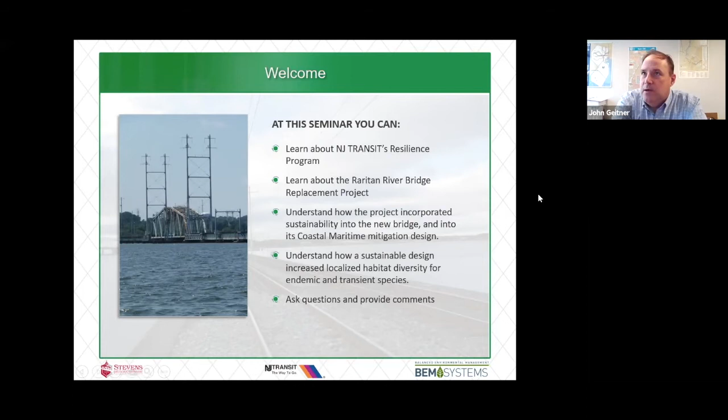A couple things about the resilience program. New Jersey Transit was the beneficiary back in 2014 of some resilience grants. These were federal grants designed to provide New Jersey Transit with funding after Superstorm Sandy. Sandy struck in 2012, and here it is 2021. So you may wonder, why has it taken so long? Why does it take so long to spend money and to build and do things? Well, there's a lot of answers to that, and I think we'll probably go through some of that as we discuss the Raritan River Draw project.

But first and foremost, there are 5 or 6 projects that fit under our resiliency suite, one of which is the reconstruction of the bridge we're about to speak about. The particular bridge I want to spend some time on, that Harold will talk about in terms of coastal resiliency, is what we call the Raritan River Draw, D-R-A-W, draw.

The bridge has an interesting history. The original bridge was built in the late 1800s and served the area until the early 1900s. It was rebuilt around that time to its current configuration. And here in 2021, we're actually endeavoring to rebuild it again. The bridge did suffer some damage during Superstorm Sandy. The damage was repaired, but the bridge structure itself was definitely in need of upgrading and updating.

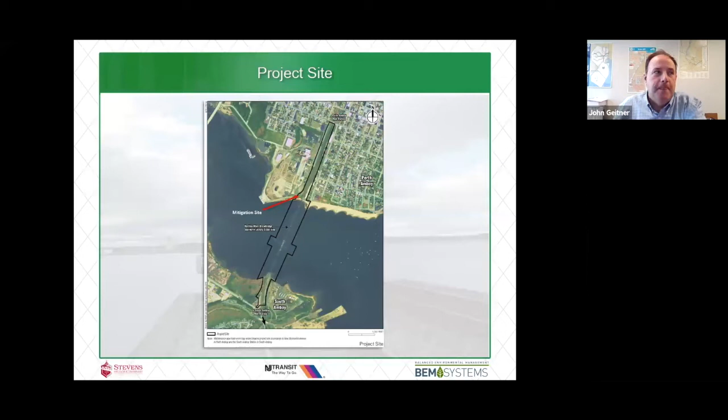Harold, next slide. So what is the bridge's purpose? On screen you can see a picture of the existing bridge. It's a low span bridge. You'll notice the bridge has poles associated with it. Those poles support a catenary structure, so the bridge supports an electrified rail operation. Catenary are the wires strung above railroad tracks that form the basis of electrical traction for locomotives that can take advantage of that traction. So New Jersey Transit does have electrified rail service in the area.

The bridge is a critical link between North and Central New Jersey and is part of our North Jersey Coast Line. It was built in the middle to late 1800s, originally by the New York and Long Branch Railroad, and we follow basically the same alignment. The bridge carries not only New Jersey Transit, but of interesting note to the project, it also carries some freight traffic in what they call the Conrail Shared Assets territory. So it forms an important link for both freight and commuter traffic across the Raritan River.

During Superstorm Sandy in 2012, the bridge did receive some damage. The damage was repaired, but as I mentioned earlier, there were damages to the structure that really needed to be addressed in a significant way by a full bridge replacement. New Jersey Transit submitted the project to the Federal Transit Administration, the FTA, which is our grant administrator, and it won a resiliency grant for replacement. It's a significant high dollar value project, about $650 million to replace the bridge.

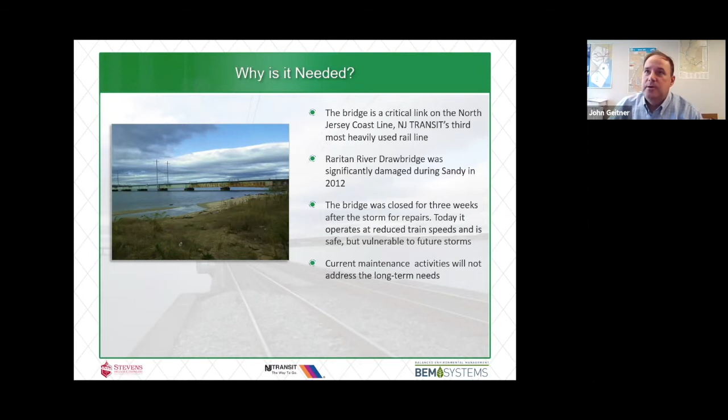We do currently maintain the bridge. It's actually a relatively expensive bridge to maintain. It's a relatively long bridge. And those maintenance activities, unfortunately, are not going to address the long-term needs to strengthen the bridge itself. That'll only be met by the replacement of the bridge. Harold, next slide, please.

So when we take a look at a project, we need to state a purpose and need. So obviously the replacement of the Raritan River Bridge is to bring about a more resilient structure that services the needs of transportation in this part of New Jersey, both public transportation and, of course, private freight transportation. We want to make sure that the new bridge design will make it more resistant to storm events and to ocean surges associated with storm events.

We want to make sure that we raise the tracks and some of the electrical and mechanical systems on the bridge to a better design flood elevation to make sure that it's less vulnerable to wind and wave action. We want to make sure that any components that we install can better withstand saltwater, ocean surge. Again, anything to do with water.

Keep in mind, I had mentioned that the bridge was, in fact, able to service electric traction. So a good component of the bridge is some of the components that feed that electrical traction system. So the goal here was to make sure that that system would not be vulnerable to additional wind and wave action. We wanted to make sure that its structural capacity is able to comply with current codes, and I'll speak more about that later.

But as you might imagine, bridges that were built 100 years ago, they're not as adequate as they could be for increasing size and load. And that's especially true on the freight side. In fact, on the freight railroading side, we've seen a significant increase in car capacity in terms of weight. So that seems to keep on going up.

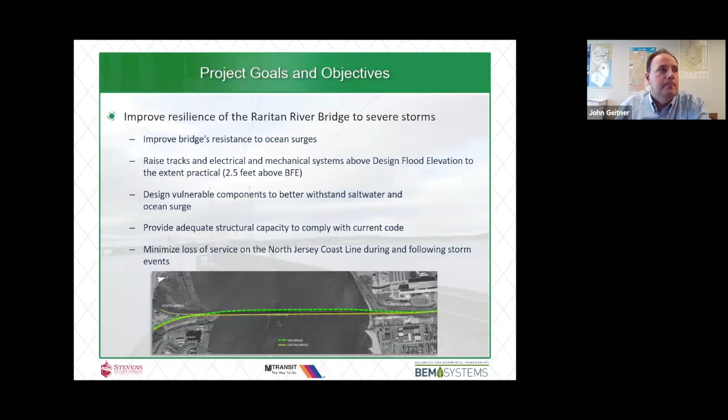So more specifically, some of the improvements that will be made as we replace the bridge, and we'll go over what kind of bridge we're going to replace in a second. But it needs to be designed to meet our design flood criteria. And I mentioned that was basically 2.5 feet above base flood elevation. And Harold will talk a little more about that later on, most likely. But New Jersey Transit does have design criteria. Right now, our criteria is 2.5 feet above what we call base flood elevation.

As we look at things like sea level rise or the increasing frequency or intensity of storms, we're going to need to revisit that number. In fact, right now, the New Jersey DEP and the governor's office are really developing a pretty sound resiliency plan, and thereafter regulations to support it that will take a careful look at flood elevation in light of threats such as sea level rise and, of course, the frequency and intensity of storms.

I mentioned earlier that we want to be able to accommodate heavier freight trains, right? So the current heavy standard now for freight cars is 286,000 pounds per car. So that's a significant weight. Freight railroads are looking to petition the Federal Railroad Administration to raise that even higher, up to 315,000 pounds per rail car. So that's pretty significant.

So when you think about the weight of things, just so you have a way of referencing it, a typical New Jersey Transit multi-level coach weighs about 70 tons. So here you're talking about a freight car that weighs in excess of 150 tons, more than double that. So again, freight cars are heavy. As they trundle along, they create a lot of stresses on rail, track bed, track structure, and of course, especially bridge structures.

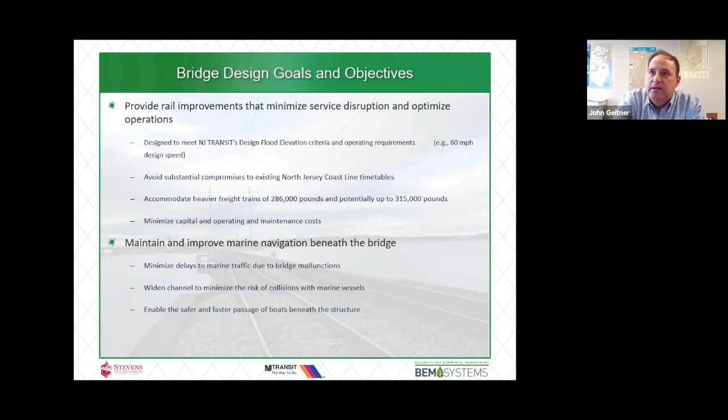We also took a look at, could we rehabilitate the existing structure? Would that make sense? Could we rehabilitate it to a point at which it would be able to support 315,000 pound freight cars and 60-mile-per-hour rail traffic? And when we took a look at that alternative, we understood that the amount of money it would take to rehab the existing structure was actually more than it now takes to replace the structure.

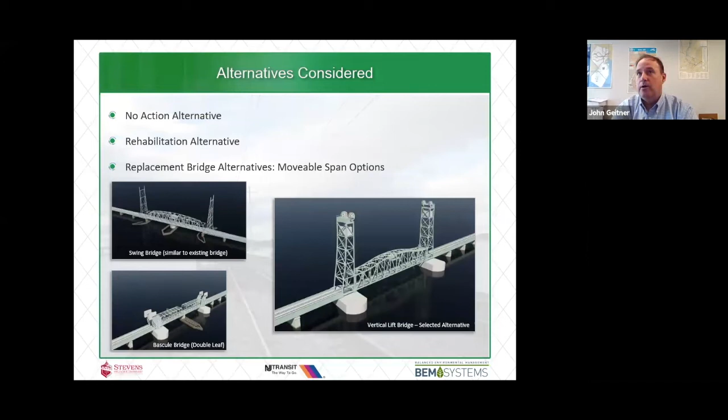So when we worked closely with the Coast Guard to permit this type of bridge, they were very interested in the height restriction because that does limit marine traffic. So we had to make sure that this bridge's height restriction was no less than other bridges upstream of this bridge. So that was an important consideration. So actually, when this bridge is built, it'll have two of the highest towers of any lift bridge in North America. So of note there.

Harold, next slide, please. So just a quick thing before I turn over to Harold. We talk here about the design flood elevation. I mentioned for New Jersey Transit, we had to work closely with our grant agency, FTA, to ensure that the design flood elevation that we chose to implement with the bridge was consistent with resiliency standards at the time.

So we relied on FEMA flood mapping. We took a look at the New Jersey Uniform Construction Code, which we're responsible to follow for structures that involve the public. We also took a look at the best available science data at the time. We looked at the 500-year floodplain elevation. We took a look at climate science and where things were going. And we came up with our design flood elevation based on those inputs.

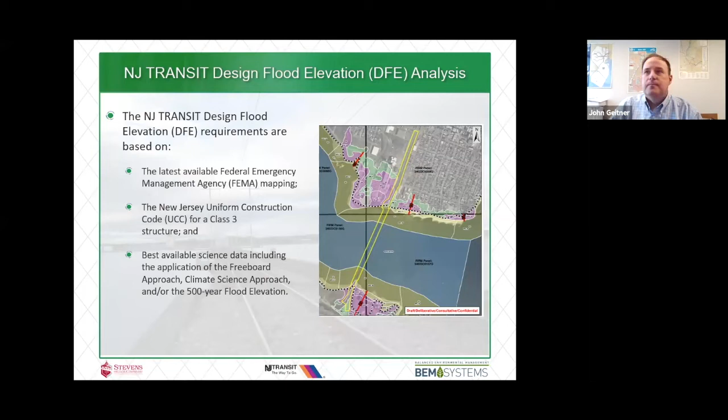So next slide, please. Kind of gives an idea, and again, Harold will take over past this slide, but for the most part, we chose a profile and an elevation that is consistent with our base flood elevation plus 2.5 feet for the design flood elevation. We wanted to make sure, and this was an important thing with this bridge, I mentioned it carries freight traffic. And if you can imagine, a freight train with several cars of 315,000 pounds, they don't climb hills too easily. So the approach to the bridge really needed to be carefully weighed out.

The approach to the bridge will be a little higher than the existing bridge, and that's consistent with our design flood elevation. It also helps us to keep critical components out of the water, but again, the design couldn't be too high.

Some people have asked, well, why not build a bridge that doesn't have a movable span? Why not build a bridge as high as a highway bridge? I think the obvious answer there is that the approaches for the bridge would have to be so far inland to avoid a grade that would otherwise make the bridge unusable for rail traffic. And to put the approaches that far inland would involve a great deal of property taking and whatnot. It would be a hugely expensive concept.

So this bridge is higher than the existing Raritan River Draw. It'll serve that purpose for resiliency. It'll meet our design flood elevation, but it'll still allow trains to maintain a 60-mile-an-hour passenger limit and allow freight trains to climb up and over and down the bridge safely.

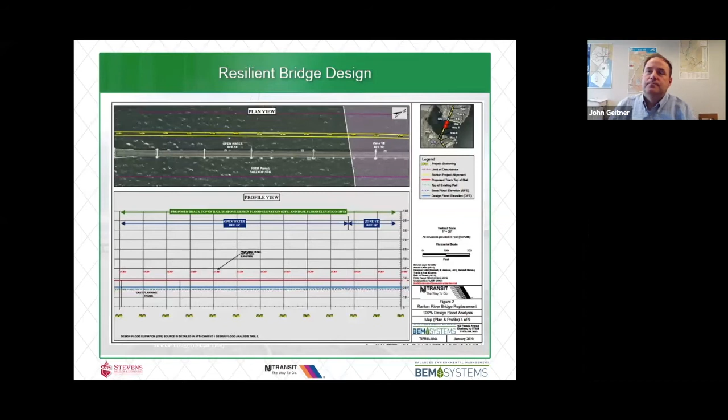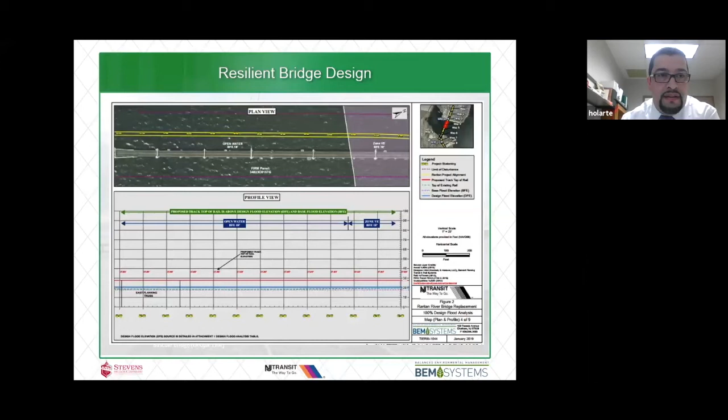Yeah, so just to add to this slide, John, I would just say to the group, basically there were specific segments of the alignment that could not be raised at the DFE. So those specific areas, their critical electrical components were raised or hardened specifically as needed. So we'll move on here.

All right, so you heard a little bit about the bridge improvements itself, and consistently with the improvements, there's obviously a permit effort to authorize that with DEP and the Corps. We went through that formal process. A component of that permitting effort was obviously to meet mitigation compliance for any impacts to coastal wetlands, subtidal, intertidal shallows. Overall, the impact for the project was about 0.384 acres.

We selected a site that John had shown initially in the overall aerial, which is literally on the northwest section of the project itself. This is the existing aerial of what that mitigation site looks like. Currently, there's areas that need some remediation. There's a lot of rubble and debris, which was kind of the historic old-fashioned way of hardening shorelines. Basically, whenever there were roadway improvements or construction debris, sometimes that was dropped and hardened along shorelines to really protect them from the dynamic impact of tidal waters.

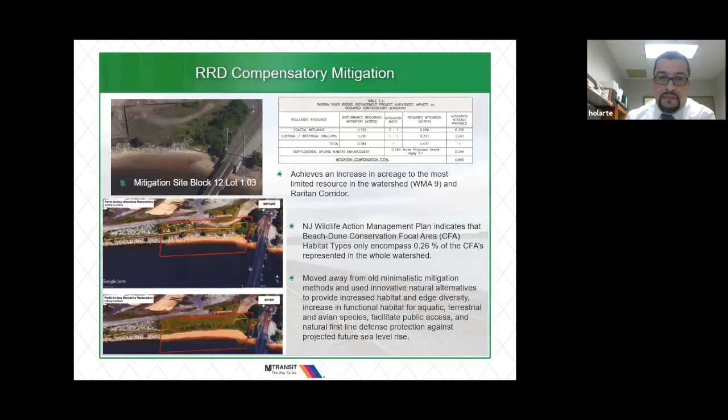We wanted to achieve restoring the lost historic wetland functions and values that were required from the proposed project, remediate the site, provide ecological functions, improve habitat for wildlife, prevent flood damage, and address sea level rise resilience for the project. So what does the mitigation provide in general? The way it was designed and reconsidered, it provides floodwater storage. It provides TSS removal, filtration from your landward side, and improves the quality of water being discharged onto your bay or tidal waters.

And it also provides filtration on the aquatic side itself with some of the measures we put in, specifically the oyster reefs or whelk reefs that are going to be implemented. A diversity of habitat that's going to support fish nursery and spawning functions, provide shelter, and baseline benthic resources. With the living shoreline that's been proposed, we're installing reef balls, whelk reefs, and intertidal vegetated areas. As I mentioned before, this will provide some benefit for neotropical species.

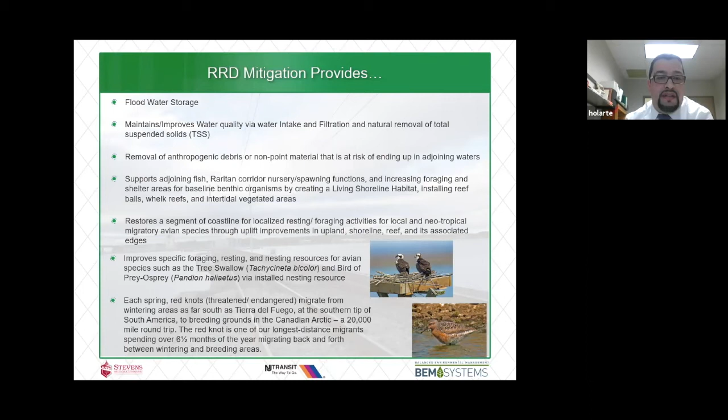One key factor of this type of mitigation, aside from its resilient component, is diversity in habitat, which serves to address specifically federally threatened and state endangered species like red knot, which is pictured here, which obviously migrates from South America all the way to the northern Canadian Arctic regions. And there's thousands and thousands of these specific species that use New Jersey as an intermediate feeding ground. They predominantly feed on crab eggs and other benthics that are found in the resources that we intend to integrate.

So thinking of the aerial that I showed you previously, this is kind of topographically how we would modify the site. Obviously, we're looking not just at a vertical improvement, but also an improvement of habitat and edges and ecotones from the subtidal side of the property, which is basically starting with your reef balls and how that functions for aquatic species as a source of shelter, a source of breeding and feeding.

And then the kind of herringbone placed oyster reefs or whelk reefs. The reason they are placed in this specific alignment is they serve a dual function of not just providing habitat and resources for foraging, but they also work as a natural defense, and also as the tide goes through its ebb and flow and recedes, there's always a deposition of sediment north of those structures, which in time start to replenish the beach behind it. So they serve as a natural mechanism to restore natural elevations on the beach side as well.

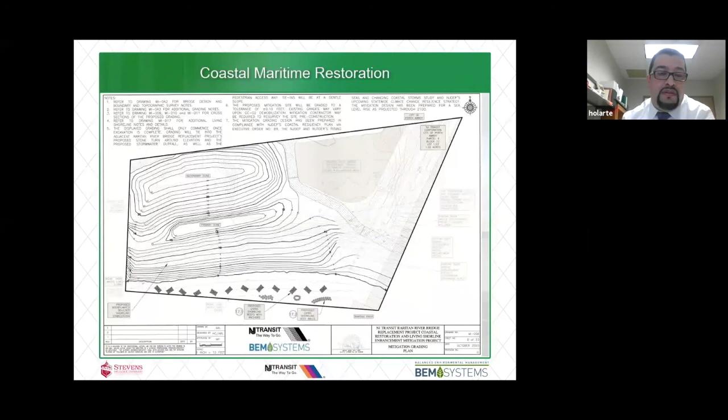You can see also on this plan, there is a public walkway component and obviously a staging area for New Jersey Transit in the future to use for maintenance purposes of the bridge. This public access component will tie into a future amphitheater that the city of Perth Amboy is pursuing. So this would be a great opportunity to invite the public to the waterfront area and really learn what resources exist and why they are not just important, but critical for protection of our inland resources.

So one thing to consider with regards to this mitigation effort was, aside from just doing a straight mitigation, how could we do something that could withstand the test of time and obviously an increase of sea level rise due to climate change and other factors. The rate of impact on existing wetlands, settling of historic wetlands, et cetera, is a real factor. So we looked at the sea level rise as it relates to New Jersey's rising seas and changing coastal storms.

The STAP report really provided a localized projection in terms of sea level rise for New Jersey. Other resources like NOAA provide more of a generic resource, which really couldn't be specifically applied to our circumstance here. So we looked at the projections for the mitigation project. They used the most conservative approach, which corresponded to the 95th percentile projection of sea level rise under the high emission scenario. And if anyone's interested, this is all public information. There's a whole explanation of how the STAP report was developed and how sea level rise was projected for New Jersey specifically. The thought is New Jersey is at higher risk than other states from tectonic rebound, and that's why this specific report was a great resource for us.

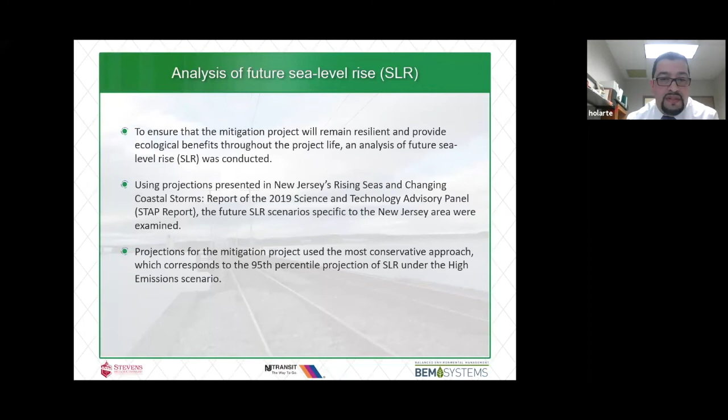So the analysis was evaluated against the 95th percentile as mentioned. The high scenario in the STAP report provided an elevation of 8.8, that's circled here on this specific table, in the year 2100. So the mitigation site was designed to withstand dynamic interchange at that elevation up to the year 2100.

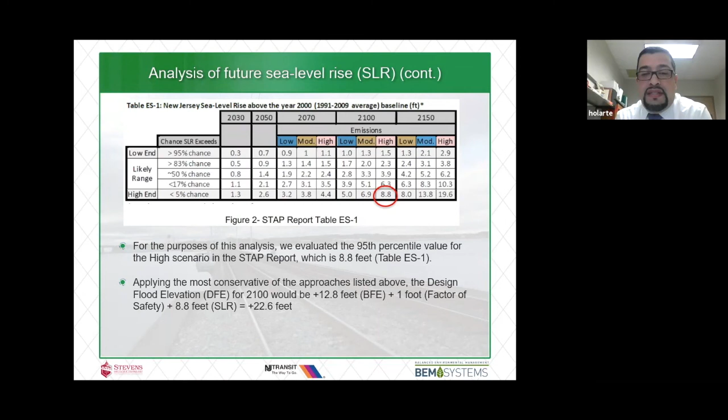So when you applied design flood elevation for the year 2100, the projected base flood elevation of 12.8 feet, plus a 1 foot factor for safety and the 8.8 foot sea level rise consideration, 22.6 feet overall was the projection. We looked at that against our mitigation site to see how it would withstand that, to ensure that we were providing a resilient design that served dual functions of withstanding sea level rise in the future, diversifying the habitat in this limited space we had, and providing a service for various endemic species, whether they were aquatic, terrestrial, or avian.

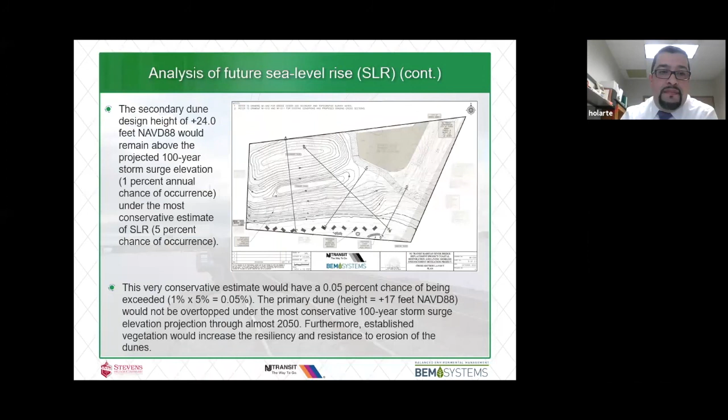And then you would have an increase of a kind of boulder shoreline, more of a natural hardened area interplanted with vegetation from beach dune vegetation, and we diversified that with fruit-bearing species, seasonal fruit-bearing species to support various animals that can depend on this area, whether they were endemic or transient in nature.

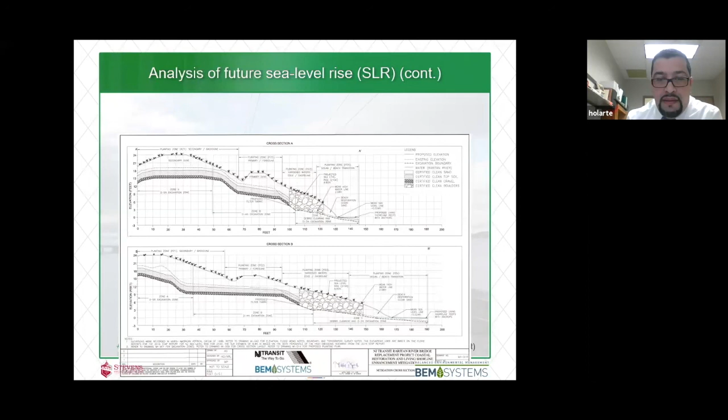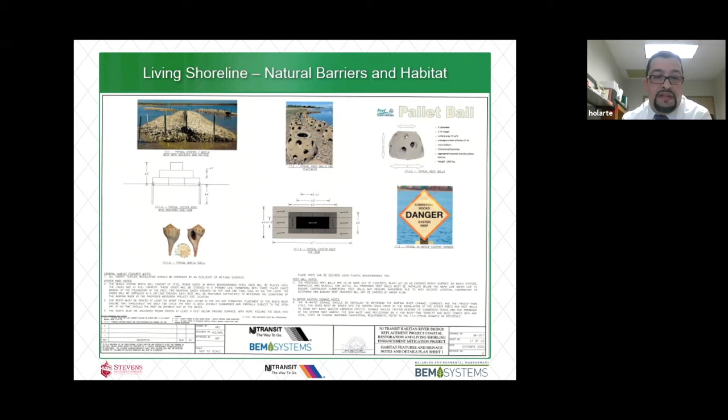So obviously we know that beaches naturally erode and rebuild over time. The process of erosion has accelerated in recent years, very likely an impact of increased storm frequency, climate change, and sea level rise. The establishment of near-shore shell bars or oyster whelk shell reefs reduce erosion and help naturally trap sand and raise beach elevation over time.

One unique fact is one adult oyster filters and cleans up to 50 gallons of water per day. So obviously, these oyster reefs, as they propagate and expand with the baseline support that we put in, the intention is for there to be localized water quality improvement as well, aside from providing benthic habitat and foraging and shelter resources. And in general, when used correctly, they protect the shoreline.

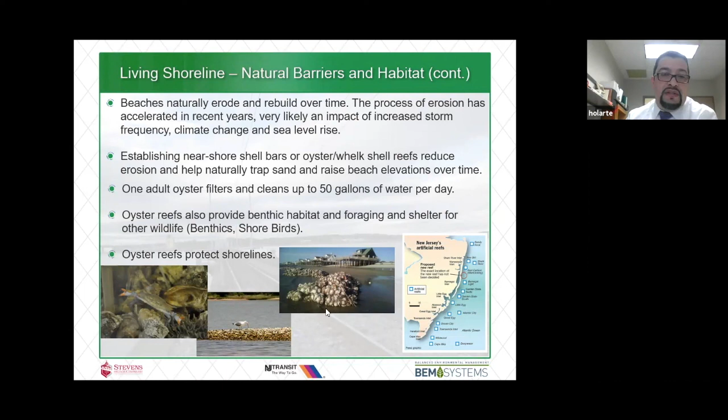Here on the right, you can see several artificial reefs that are established throughout the state. Some of these also on the Delaware side, you can see in this image, are several projects like this where the littoral societies and other entities have put these oyster reefs in place and they have worked very well.